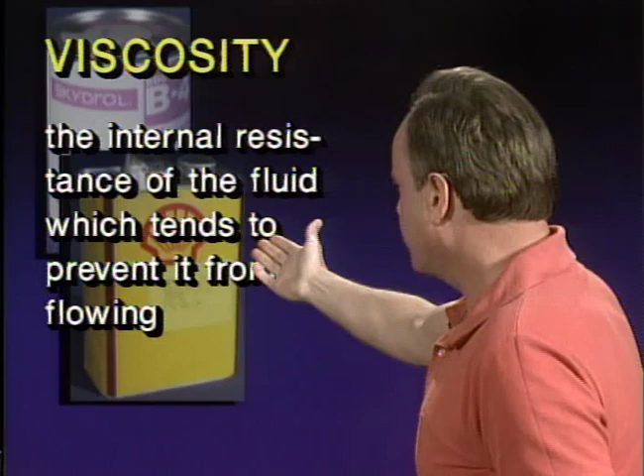They're also going to ask you, what is the viscosity of a fluid? What does that mean? Well, viscosity is the internal resistance of a fluid that tends to prevent it from flowing, slows it down quite a bit.

What are desirable properties of a good hydraulic fluid? Well, they are low viscosity, chemical stability so they don't combine with other things or create chemical reactions, and high flash point. Now, flash point is when the fluid gives off ignitable vapors - you want that to occur at a very high temperature. And high fire point - fire point is getting enough vapors to support flame. Those are desirable characteristics of a good hydraulic fluid. I would think so too.

Now, when you're servicing hydraulic systems, you want to use the type of fluid specified in the aircraft manufacturer's maintenance manual or the service manual or the instruction plate affixed to the reservoir unit. In other words, you cannot go wrong doing what the manufacturer tells you to do.

Now, let's take a look at the two most common types of hydraulic fluid currently found in aircraft. By the way, hydraulic fluids are dyed a specific color for each type of fluid. One fluid is mineral-based, referred to as petroleum-based. Petroleum is a mineral, and it is dyed red, so if you saw the fluid itself, you'd know it was dyed red. The other is phosphate ester-based, which is Skydrol, a synthetic, and it's dyed purple.

Now let's take a look at some information they want you to know. First of all, information about the compatibility of fire-resistant hydraulic fluid with aircraft materials can be obtained from the manufacturer's technical bulletins. So where do you get information about the compatibility of materials with hydraulic fluids? The manufacturer's technical bulletins. You cannot go wrong by using the manufacturer's information.

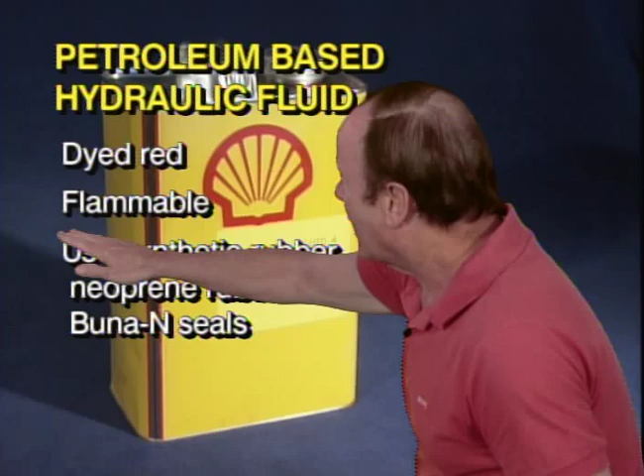Now let's take a look at some of the pros and cons of these hydraulic fluids. First of all, petroleum or mineral-based hydraulic fluid, as you remember, is dyed red. One of the cons, I would think, is that it is flammable. I can't think of why that would be a good thing, but one of the pros is you can use it with synthetic rubber, neoprene rubber, and Buna-N seals. The FAA wants you to know that additives have improved the properties and characteristics of petroleum-based hydraulic fluid through the years.

Now let's take a look at vegetable-based hydraulic fluid, which is mil spec 7644. These aren't used very much anymore, but they're dyed blue in color. They're flammable under normal conditions, and vegetable-based hydraulic fluid is used with natural rubber seals. That's the reason it's not used much anymore - there aren't too many natural rubber seals around anymore.

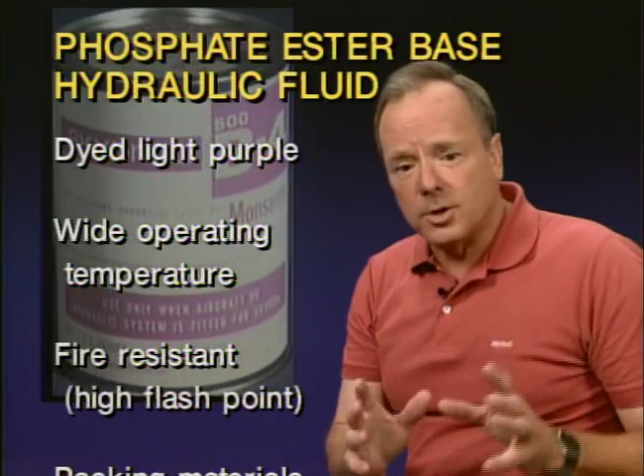Now, as you already know, both petroleum-based and vegetable-based hydraulic fluids are flammable under normal conditions. Well, that's really not as good as it could be, so mankind made an improvement with a synthetic hydraulic fluid called Skydrol, or more officially phosphate ester-based hydraulic fluid. It's a synthetic, dyed light purple, with a wide operating temperature range. But the most important thing, it's fire resistant - it has a high flash point, tremendous temperatures, and it doesn't catch fire.

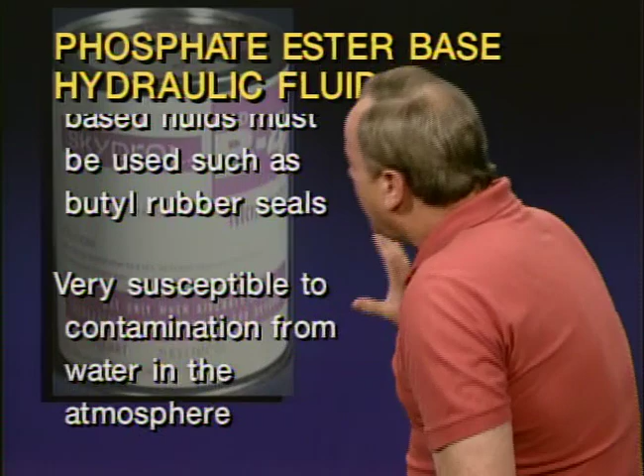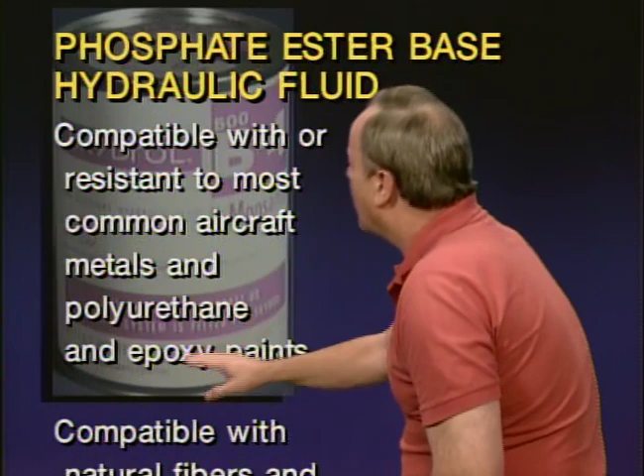Now, packing materials made for ester-based fluids must be used when you're using this - an example would be butyl rubber seals. Not just any kind of packing materials, they must be made for it. The biggest disadvantage of phosphate ester-based fluid is it's very susceptible to contamination from water in the atmosphere if you leave it unprotected. However, it is compatible with or resistant to most common aircraft metals, and official FAA materials say it's also compatible with polyurethane and epoxy paints - these are the ones that look wet all the time, really shiny. I can tell you from experience that's not necessarily true, but it is the correct answer on the test.

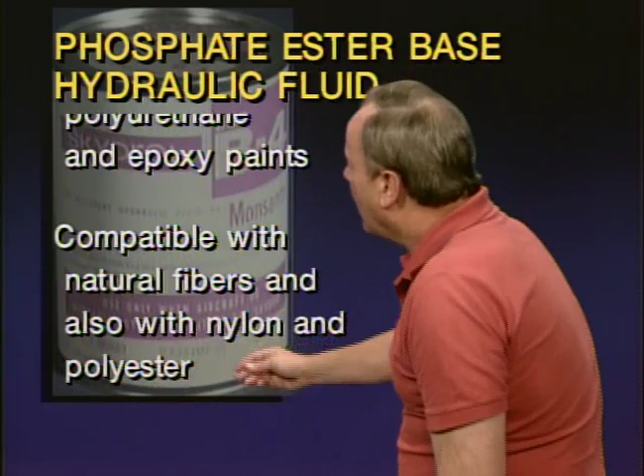It's also compatible with natural fibers and also with nylon and polyester. So it's pretty good stuff, very flexible, high flash point, really great.

But you cannot mix it. In fact, they're going to ask you a question about mixing hydraulic fluids. Let's take a look at that question now.

Now, let's assume you have an aircraft hydraulic system that requires mineral-based hydraulic fluid like 5606, and let's assume instead you use a phosphate ester-based fluid like Skydrol. The question is, what is going to happen? Well, the system will become contaminated because the fluids will not blend, and the seals will fail. That's considered to be a very bad thing.

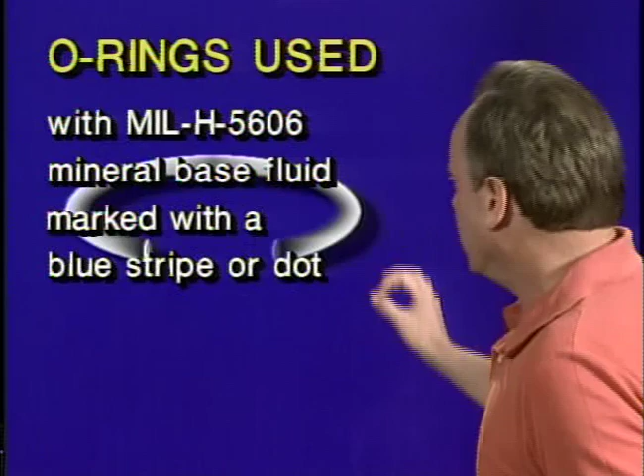Now, if the O-ring has a little blue stripe or a dot, it's to be used with mil-spec 5606 mineral-based fluid. So if you're going to use it with mineral-based fluid, it should be marked with a blue stripe or a dot. All right, let's talk about high-pressure O-rings.

Now let's assume you're going to operate an O-ring in a system having above 1500 psi. One of the problems you could have when you got very high pressure is that the O-ring actually gets squeezed by the hydraulic pressure until it's in between the moving and the stationary part. They call that extruding it. It gets extruded between the two.

What do you do to prevent that? And the answer is you use a backup ring. There are special rings made to back up the O-ring to keep the O-ring from extruding between the moving and the stationary part.

Now, where do you put the backup O-ring? Do you put it on the pressure side of the O-ring or on the side away from the pressure? And the answer is you put the backup O-ring on the side away from the pressure. That's where it would tend to be extruded through, so that's where you put the backup O-ring.

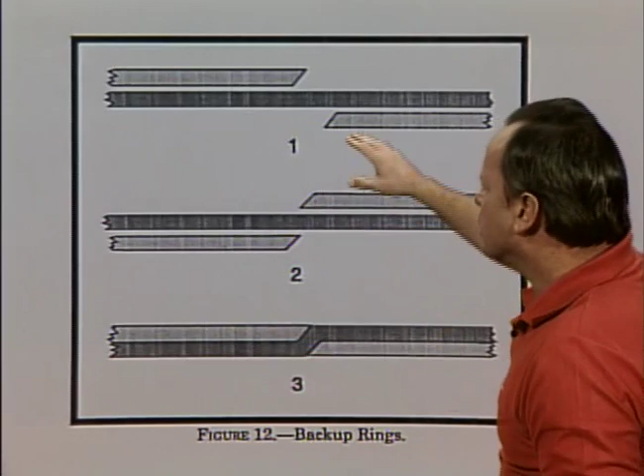Now let's take a look at figure 12, and let's assume that you have a Teflon backup ring. They're going to ask you to look at three possibilities for Teflon backup rings, and which of these spirals would be the correct one. What you want to avoid is having any kind of joggle. You can see that spiral 2 would have a joggle, spiral 1 would not, spiral 3 would not. So illustrations 1 and 3 show the correct spiral for Teflon backup rings.

Now, let's take a look at the difference between gaskets and packing materials. Gaskets are normally used in stationary parts, and packing materials are flexible sealing elements, seals, used when you're subject to motion. So packing materials are flexible sealing elements used subject to motion, and that's in between moving parts normally we're talking about here.

Now, to protect packing rings or seals from damage when installing them over or inside threaded sections, if you're going to put an O-ring — which can be a packing material — over a threaded section, put a little cardboard on the threaded section, then put the O-ring on it, just protecting the seal from the threaded sections. This should be covered with a stiff paper sleeve, as they say on the test.

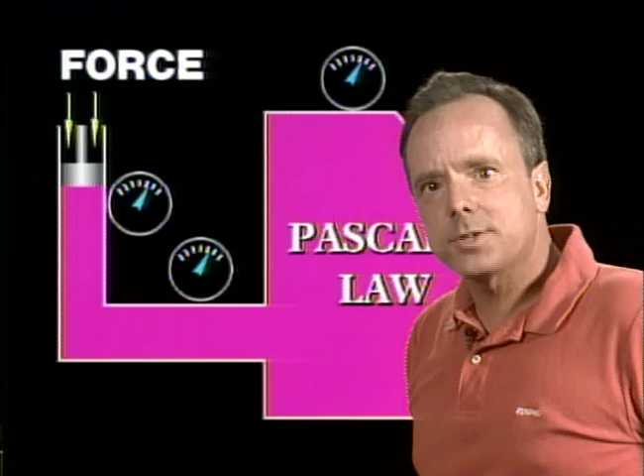Now let's take a look at some basic hydraulic information they're going to ask you on the test. First of all, they're going to ask you about Pascal's law. And here's a good example of Pascal's law: pressure in an enclosed hydraulic system is equal and undiminished in all directions. In other words, if you have 100 pounds per square inch here, you've got it everywhere in the entire system. And that's the principle in which hydraulic systems work, and that's Pascal's law.

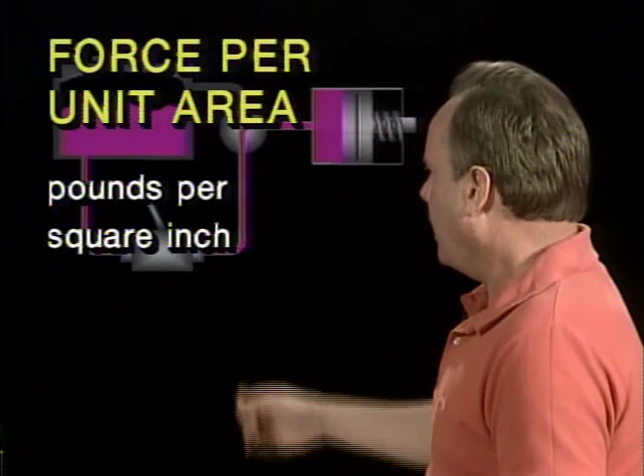Now, pressure is a term used to indicate the force per unit area. They're going to ask you this on the test. It's force per unit area, and it's expressed in pounds per square inch. So pressure is expressed in pounds per square inch. Now let's assume you take a hydraulic system like this and you build up 100 psi pressure, pounds per square inch pressure.

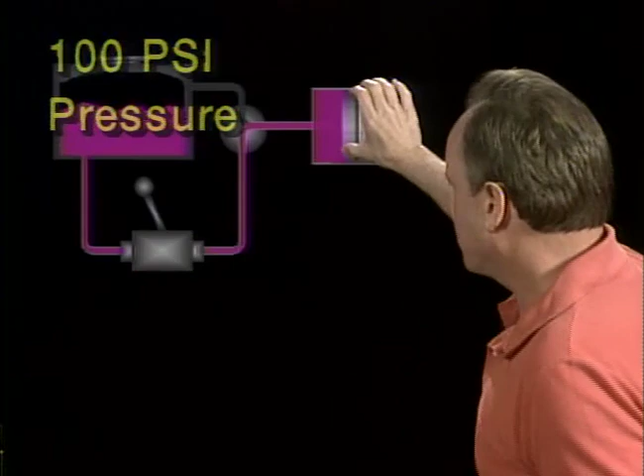Let's assume the piston is 1 inch diameter, with a 1/2 inch line, and an actuating cylinder that's 2 inches in diameter. They're going to ask you the question: what is the pressure in the line between the pump and the actuator? Well, if you have 100 psi anywhere in the system, you have 100 psi everywhere in the system. It doesn't matter whether you have a 1/2 inch line, a 2 inch line, a 2 inch cylinder, or a 1 inch cylinder - it doesn't matter at all. If you have 100 psi anywhere inside the closed part of the system, you've got 100 psi everywhere, and that's what they're asking you on the test.

Hydraulic systems in aircraft have certain characteristics. One of them is minimum maintenance requirements. Others are that they're lightweight and simple to inspect, and that's why they use hydraulic systems in aircraft.

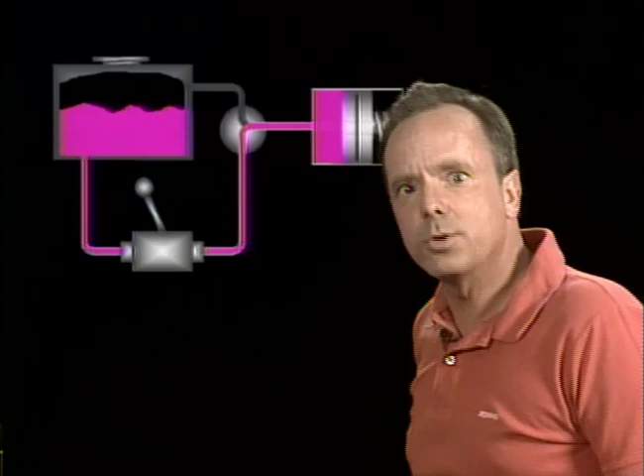Excluding lines, they're going to ask you on a test what are the basic components required to make a simple hydraulic system. Let's take a look. First of all, you have to have a pump - here we have a hand pump. You have to have a reservoir to supply that pump. Then you have a selector valve, so you can decide whether you're going to run it to the actuator or back to the reservoir. And finally, you have an actuator. So the simple parts of a hydraulic system are just those things: the pump, the reservoir, selector valve, and an actuator.

Now they're going to ask on a test, what is a hydraulic system referred to as a power pack system? A power pack system is when you have the motor and pump all together as one unit, and they say that on the test as having hydraulic power components in one unit. The motor and the pump are all together.

Now let's assume you get air in a hydraulic system. They're going to ask you, is that normally a problem? And the answer is no. Removal of air from a hydraulic system generally presents no problem because the air will be removed by operating the various hydraulic components through several cycles. So air is not normally a problem in hydraulic systems.

Now they're also going to ask you a question about air. They'll say, if the time required to operate a hydraulically actuated mechanism decreases with successive operations, what does that mean? In other words, if it operates better and faster every time you operate it, it indicates the air is being worked out of the system.

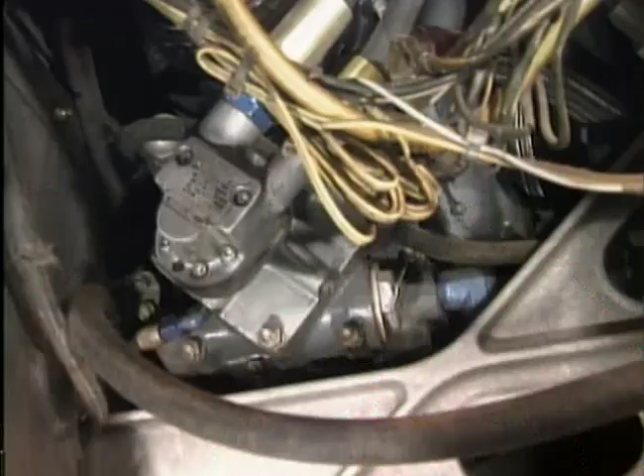Let's take a look at a few things the FAA wants you to know about hydraulic pumps. First, there are two types: constant displacement types and variable displacement hydraulic pumps. A constant displacement hydraulic pump is able to deliver a uniform rate of fluid flow - the same amount of fluid per minute comes out. On the other hand, a variable displacement hydraulic pump is a current design that contains a built-in means of system pressure regulation, and it can vary the amount of fluid that it delivers. That's the difference between the two.

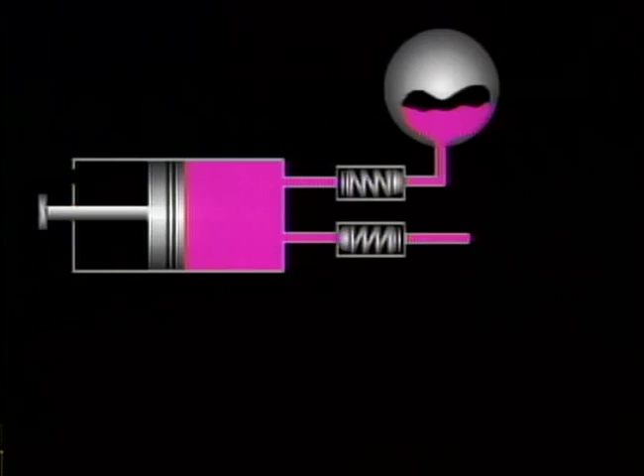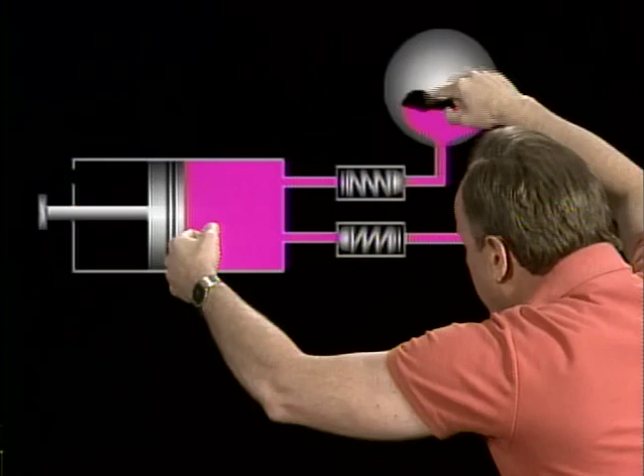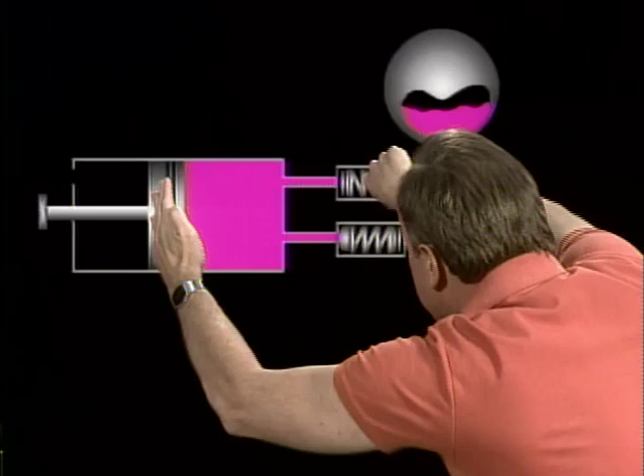The FAA wants you to know a few things about pump malfunctions, so let's talk about how a pump functions before we talk about how it malfunctions. Here's a hand hydraulic pump, very simple. This piston is connected to a handle, and you move the piston back and forth. When you move the piston to increase the size of the cylinder, hydraulic fluid flows from the reservoir through this check valve into the hydraulic cylinder. This check valve allows fluid to flow in but not out again - that's the input or import valve. Then when the piston is all the way at the far end of its travel, you push back on the piston. This check valve won't let the fluid go back that direction, but the output valve lets the fluid go out and won't let it return. So you have two check valves.

One lets it flow in, the other lets it only flow out, and that's a very simple hand pump.

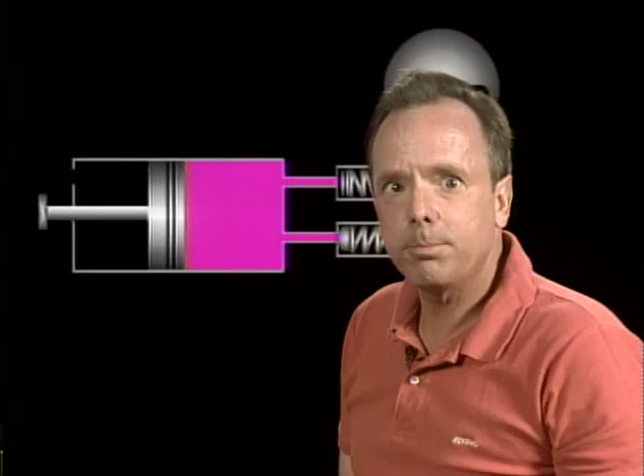Now they're going to ask you a question about a malfunction of this pump. They're going to say if the handle of a rebuilt hydraulic hand pump cannot be moved in the pumping direction. In other words, you can pull it out, but you can't push it back. What's likely to be the problem?

The answer is you might have installed this check valve backwards such that it won't let the fluid out. So one possibility is an incorrectly installed hand pump outport check valve, probably installed backwards.

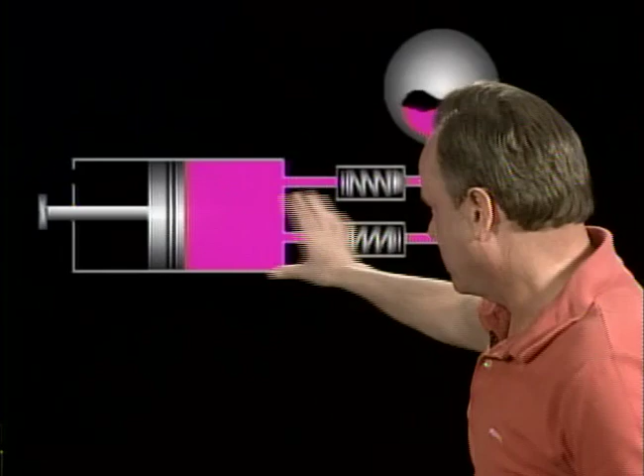Let's take a look at another question they might ask you about this. They'll say, let's assume you're operating a hand pump like so, and you have severe kickback. By the way, this could be an emergency hydraulic pump. That's what this would be, just a hand pump. What would that severe kickback indicate?

The answer is it indicates the hand pump outport valve is sticking open, because if this check valve sticks open, it lets the fluid come back and kicks back against the handle. So the hand pump outport check valve is sticking open if you have severe kickback.

Those are the couple questions they're going to ask you about hand pumps. Now let's assume you have a mechanical, not a hand pump, but a powered pump, electrically powered, and you have chattering of the hydraulic pump. What does that mean? Chattering of the pump is generally an indication of air in the system, and it could be caused by a leak in the pump inlet. That's generally the case, a pump inlet leak.

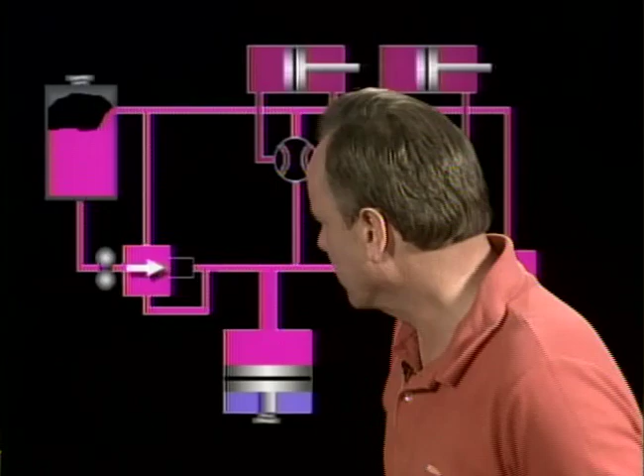Now let's see if you and I together can figure out a more complicated hydraulic system. Here's a little bit more complicated one. We're going to use this as a model throughout the rest of the course here about hydraulics, so let's take a look at it. First of all, you and I have a hydraulic reservoir, and then we have the hydraulic pump here. We could be having a gear pump here, some way to increase the hydraulic pressure.

Then you have a regulator or an unloading valve that, when the pressure gets high, unloads the pressure and sends it back to the reservoir directly instead of through the hydraulic system. Then after you go through the regulator, you have the accumulator.

An accumulator has air on this side, hydraulic fluid on this side. Now, one of the principles of hydraulic fluid is hydraulic fluid cannot compress. It's incompressible. But air is compressible, so if you have this accumulator, as you increase the hydraulic pressure, it compresses this air. It's kind of a way of storing energy.

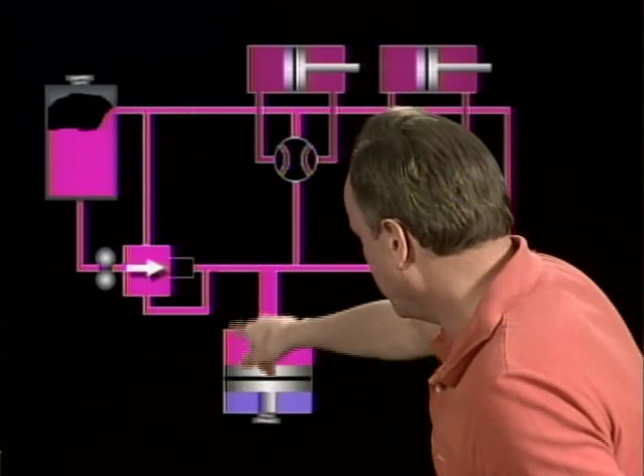It stores hydraulic fluid. When a pump gets overloaded and is delivering all it can deliver and you still need more, this accumulator can move this piston down and release some more hydraulic fluid into the system. So it's kind of a way of storing hydraulic fluid and storing energy.

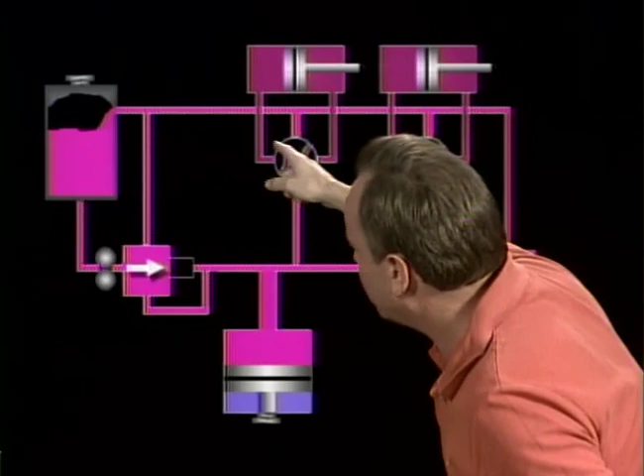It's called the accumulator. Then you'll have actuator valves, and you turn the actuator valve and operate the system with it, and what's left over, or what's being returned, goes back to the reservoir. And then you'll have a pressure relief valve in the system somewhere over here, like so. So here's a pressure relief valve.

Now, a typical question they might ask you about this: a hydraulic pump of the correct capacity fails to maintain normal system pressure during the operation of, say, a cowl flap actuating unit. So let's assume one of these actuators is actuating the cowl flap actuating unit, and you have the proper hydraulic pump, but it cannot maintain hydraulic pressure.

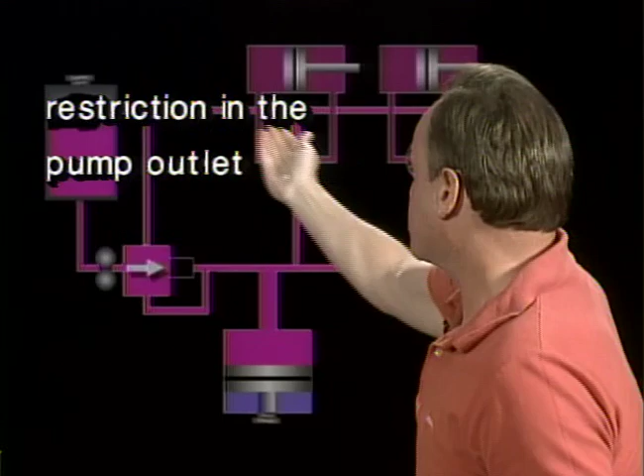What's the probable cause? If you can't maintain hydraulic pressure, and you have the proper pump right here, you might check for a restriction in the pump outlet. Let's take a look and see why that might be a problem.

First of all, you have to know where the pressure gauge is, and that's the important part of this. You have to know where the pressure gauge is. The pressure gauge is normally after the accumulator and before the actuator.

If you can't maintain pressure here, it probably means you're not getting proper flow out of the pump, period, and you should check for that restriction in the pump outlet. Now, where is the gauge normally? After the actuator, or after the accumulator, before the actuator, like so.

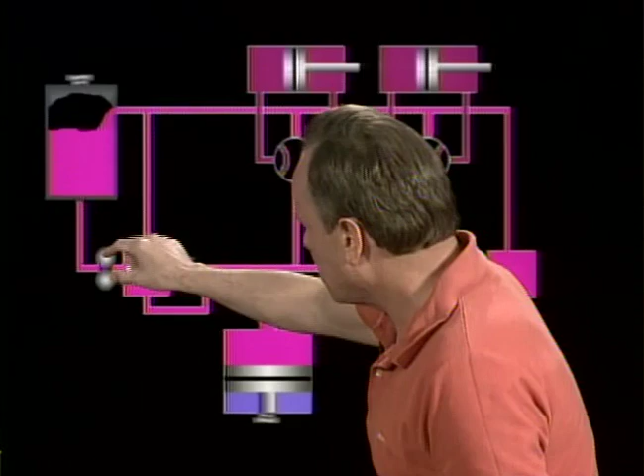Now, let's say you have a worn hydraulic pump shaft seal. You have a hydraulic pump, and the pump turns on a shaft, and the seal there is worn. Obviously what's going to happen is you would have hydraulic fluid leaking. So how would you detect a worn hydraulic pump shaft seal? You detect that by hydraulic fluid flowing from the pump drain line. Normally you would have a pump drain line and hydraulic fluid would get in there, and that would tell you you have a worn hydraulic pump shaft seal.

How about that? You really wanted to know that, didn't you?

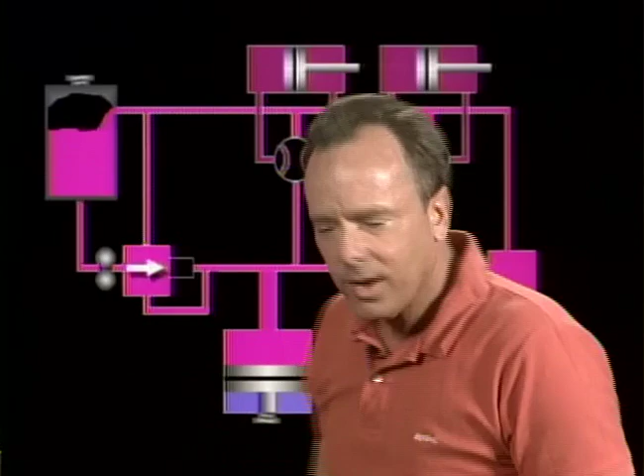Now let's assume you have a hydraulic system control and relief valve unit, and they fail to function properly. How do you keep this pump from overpressuring? If your relief valve unit or control valve unit fails, how do you keep the pump from having too much pressure? The way you keep it from having too much pressure is you have a shear section on the main hydraulic pump drive shaft. In other words, if all fails to work properly and the relief valves don't work, the pump itself is protected because the drive shaft will have a shear section and it will shear itself off, protecting the whole system from blowing something up. The shear section or shear pin on the shaft of an engine-driven hydraulic power pump allows that shaft to break to protect the pump from overload if the pump should seize.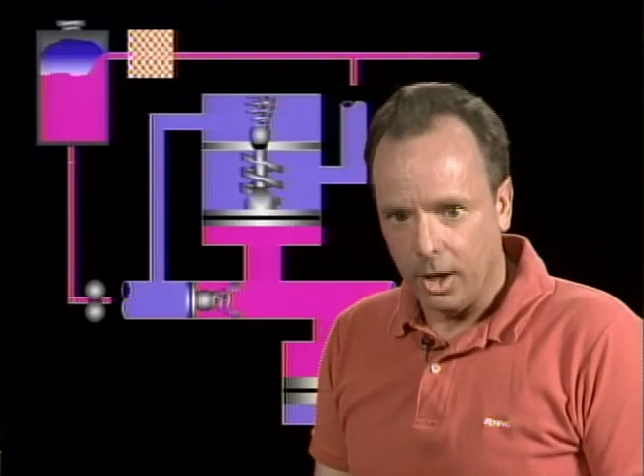All right, let's talk about pressure regulators. A pressure regulator in a hydraulic system, just after the pump, is used to maintain system operating pressure within a predetermined range. The way it works is normally you'll have a spring and ball system, and if the pressure gets too low, it'll allow the pressure to build up in the system. If it gets too high, it bypasses, and that's the whole idea. So the pressure regulator also relieves the pump of its load when no actuating units are being operated, sending the fluid back to the reservoir.

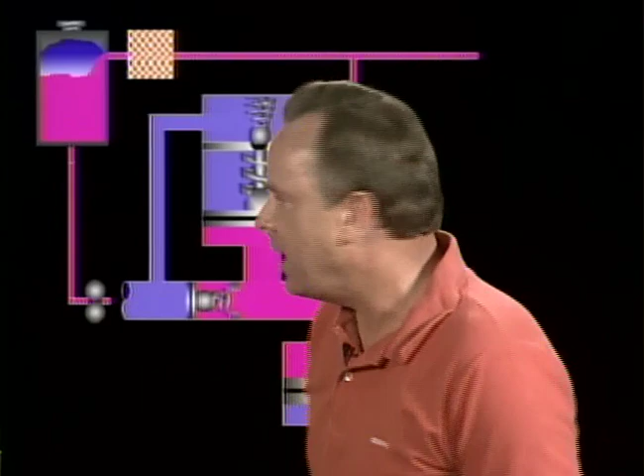Now, if the pressure regulator of a hydraulic system using a constant displacement pump diverts the fluid from the system to the reservoir, the output pressure of the pump decreases and the volume remains the same, because it simply allows it to flow back to the reservoir. So it does regulate the pressure, but it does not regulate the volume of the fluid, and that's what they want you to know on the test.

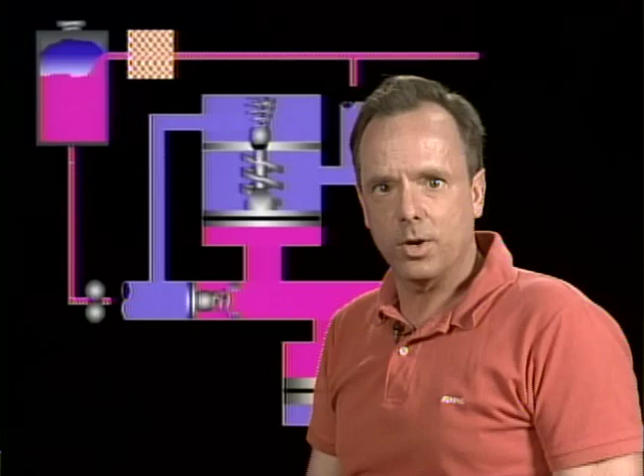Now, the pressure regulator in a hydraulic system with a constant delivery pump allows circulation of the fluid when no demands are made on the system, and that's the answer to an actual FAA type test question. Another term for this pressure regulator is an unloading valve, and it's used with the hydraulic pump to relieve pump pressure, so it's called an unloading valve.

Now they're going to ask, on all types of pressure regulators, is any attention required from the pilot? The answer is, on the spool type or any other type of hydraulic system regulator, they're automatic and require no attention from the pilot or flight crew. So that's one thing you don't have to pay attention to as a pilot.

Now if it's necessary to adjust several pressure regulating valves in a system, the procedure is to adjust the one with the highest pressure setting first, because you want to adjust each one at its own highest pressure setting.

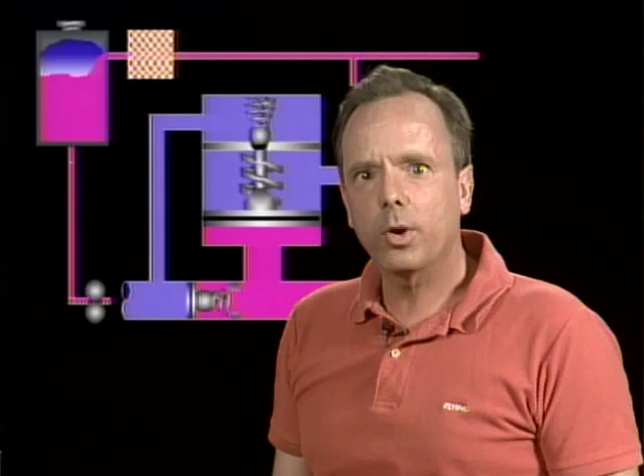Now they say, let's assume you want to remove a spool type or a balanced type pressure regulator from a hydraulic system. What precautions should you take?

The answer is to actuate some actuator, maybe the flap selector valve, until no pressure remains in the system. Remember, the accumulator can keep pressure in the system, so before you remove any components in the hydraulic system, bleed the pressure off by operating an actuator. You're trying to empty the accumulator.

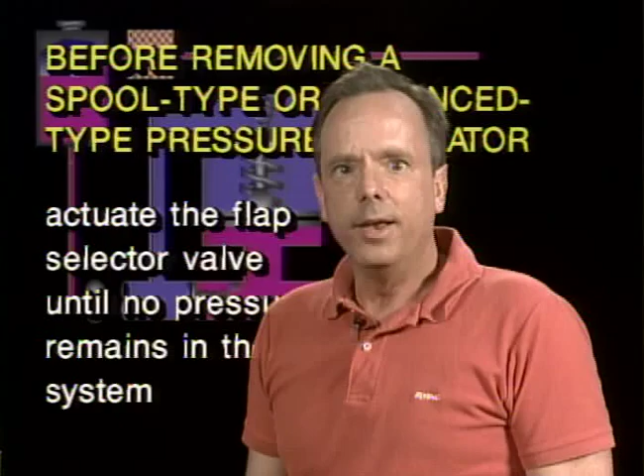Now they're also going to ask you what is a restrictor in a hydraulic system. A restrictor is any kind of restriction in the system to slow the flow. What is the purpose of a restrictor? The purpose is to control the rate of movement of hydraulically operated mechanisms, and you do that by putting a restriction in a line somewhere.

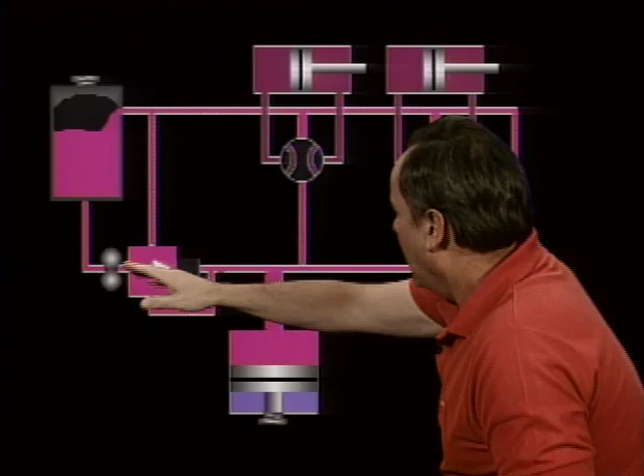It's called a restrictor. Now let's take a good close look at a hydraulic accumulator. It says hydraulic accumulator, inflate to 600 psi. Let's take a look at a hydraulic accumulator inside the system and see what we have. Here's the system: we have a reservoir which supplies hydraulic fluid to the pump, and then a pump increases the pressure and sends it down the line.

And then we have the accumulator. It has either a piston or a diaphragm, and on one side is hydraulic fluid, and on the other side is air. The purpose of this accumulator is to store or release energy, and here's how it works. The neat thing is air is compressible - it will compress and expand - whereas hydraulic fluid is not compressible, it will not compress and expand.

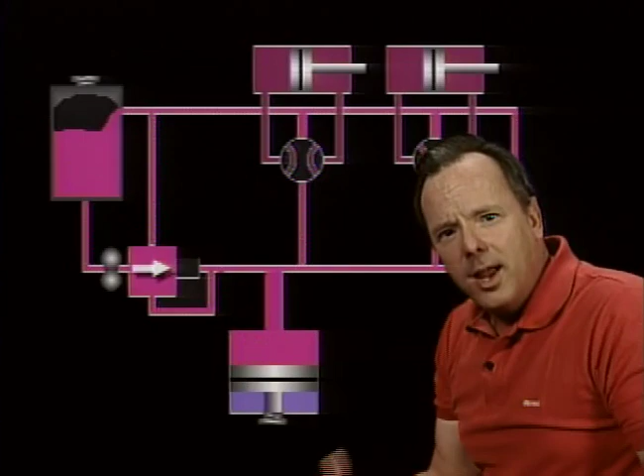So if you want to store some energy, you can pump air to this side of the accumulator and have hydraulic fluid on this side. If you have too much pressure, you wind up storing fluid because you compress the air and the excess hydraulic pressure goes into the accumulator. If, on the other hand, the hydraulic pressure begins to drop down a little bit, then the air shoves the piston or diaphragm this way and releases some of the energy it's stored up in terms of compressed air.

Now why would you want this hydraulic accumulator in here? Let's assume you're pumping fluid, you've got one of these controls activated, and all of a sudden somebody shuts it off, and the pump keeps on operating. There will be a great big pressure surge which will rattle throughout the entire system unless you have an accumulator. Because if you have one, the hydraulic fluid will go into the accumulator. The increased pressure will push this piston back, and by compressing the air, you'll store that energy and get rid of that surge.

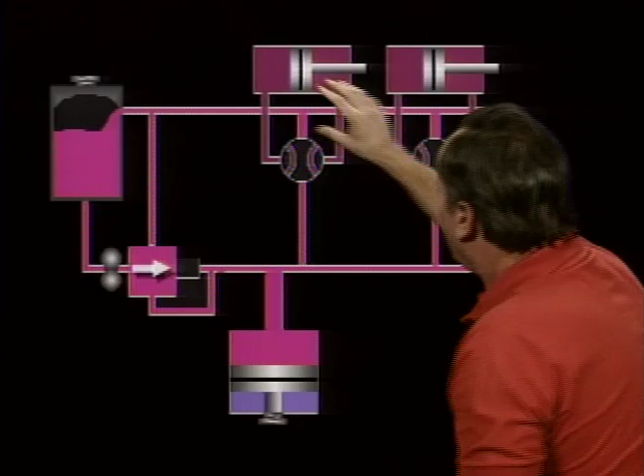Now let's assume you open up a whole lot of devices and you've got a need for a lot of hydraulic fluid, but you exceed the pump capacity - the pump is putting out all it can put out. Then the hydraulic accumulator comes into play again, because as the pressure begins to drop, this compressed air will force the piston or diaphragm in this direction and make up for the fact that the pump isn't putting out enough fluid. It will temporarily supplement the system pump when demand is beyond the pump's capacity. Or the pump could completely fail, and for some period of time the accumulator will still keep pressure on the system.

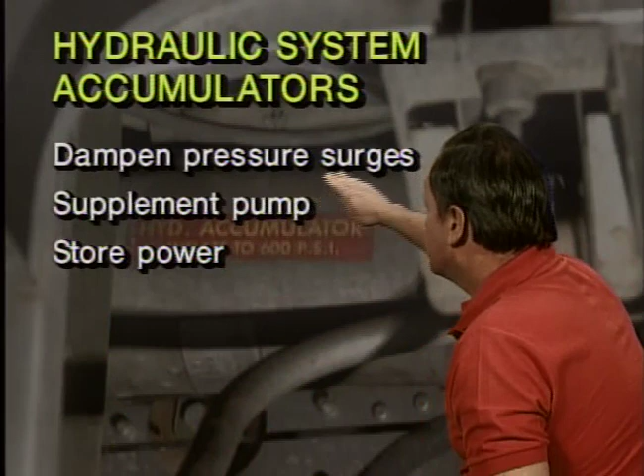So there are three things this hydraulic accumulator does. Number one, it dampens pressure surges in the system. Number two, it supplements the system pump when demand is beyond the pump capacity. Number three, it can store power for limited operation of components even if the pump is not operating. Another thing you need to know is a fully charged hydraulic accumulator provides a source of additional hydraulic power when heavy demands are placed on the system, so it's a wonderful device.

Now, to determine the air pressure charge in the accumulator, if the engine is inoperative but the system still has hydraulic pressure, there is a procedure you can follow. What you want to know is what is the air pressure here in the accumulator. We're assuming, of course, we don't have a gauge right here, but we have a gauge on the hydraulic side somewhere. There are some systems where you can actually read the air pressure inside the accumulator.

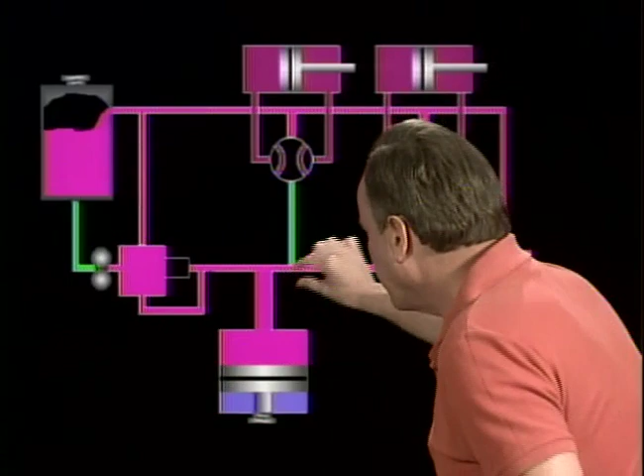All right, but if you don't have a gauge there, here's what you do: operate some hydraulic units slowly, then note the drop on the pressure gauge. Remember, the pressure gauge is on the hydraulic side of the system. Note the point at which you get a rapid drop in pressure. The pressure is going to stay about the same as the air pressure until all of a sudden this piston hits the stop, hits the limit, and then the hydraulic pressure drops off precipitously. That pressure just before the rapid drop is the pressure inside the accumulator, assuming the gauge is on the hydraulic side. So you simply operate an actuator until you get a rapid drop, and the pressure before that drop was the pressure in the accumulator, because the piston bottomed out in its travel.

So you take a look at this accumulator, you notice the air charge should be inflated to 600 psi. Here's how the FAA is going to ask you the question: to check the air charge in a hydraulic accumulator, reduce all hydraulic pressure, observe the reading of the accumulator air charge, and that's just before you get the rapid drop.

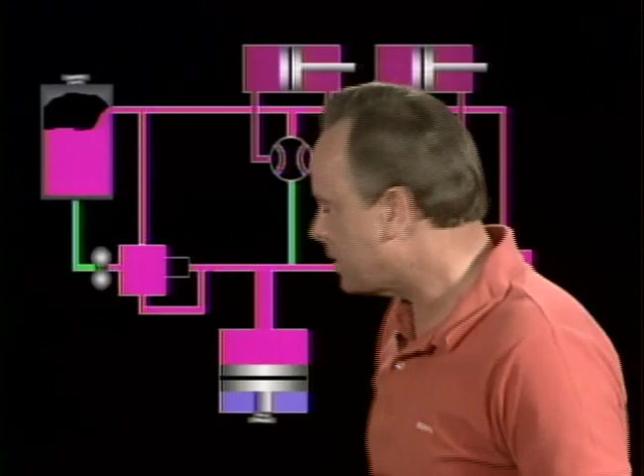Now let's take a look at that accumulator again and talk about something else. You notice there's a barrier between the hydraulic fluid side and the air side of the accumulator, and that's necessary to prevent air from entering the fluid system. It physically separates the air chamber from the oil chamber, and it could be done with a piston or a flexible or moving separator.

Now let's assume that you depress the core valve, the air core valve, often called a Schrader valve, to drain some air out, and when you do that, you get hydraulic fluid. What does that mean? If hydraulic fluid is released when the air valve core of the accumulator is depressed, it's evidence of a ruptured diaphragm. It means there's a leak and you're getting oil in the air and air in the oil.

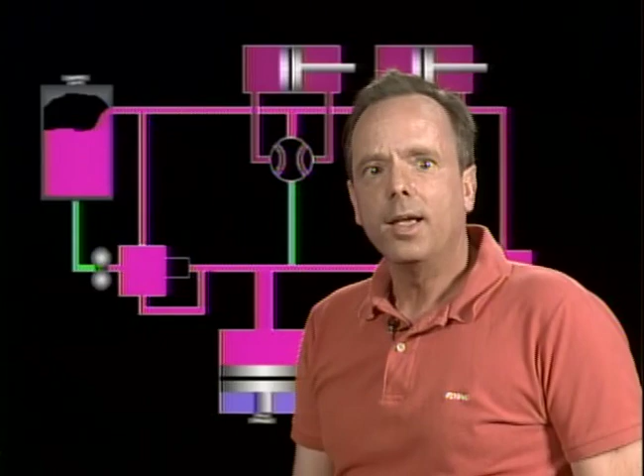Now let's assume a hydraulic accumulator has been installed and the air chamber has been charged. The main system hydraulic pressure gauge, on the hydraulic side, will not show a reading until the fluid side of the accumulator has been charged. That means you won't get any pressure on this side until the piston is away from its stops. Then these two will be equal to each other. But when the piston's on a stop, either one or the other, they won't be equal. Now they're going to ask you another question about this.

Let's assume you have a hydraulic accumulator and you charge it with an air preload on the air side of 1,000 psi. You then develop a hydraulic system pressure of 3,000 psi. The question is, when you've moved this piston off the stop and now have a hydraulic system pressure of 3,000 psi, what will be the pressure on the air side of the accumulator now? The answer is it'll be 3,000 psi. When the piston is off its stops, these two will be equal to each other, even if it was only charged with 1,000 to begin with.

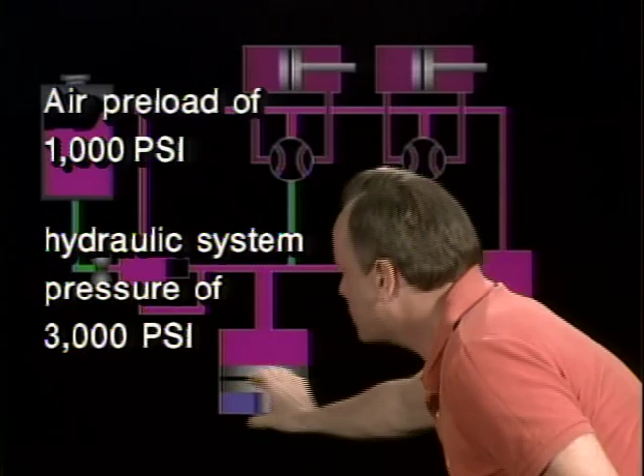If an aircraft's constant pressure hydraulic system cycles more frequently than usual, and no unusual fluid leakage can be detected, what would this tell you? The answer is low accumulator air preload. That means if you have very little airspace in here, the pressure will build up very rapidly because the piston will hit its stops on this end, and you'll have the hydraulic system relief valve work, not work, work, not work. So one of the things the accumulator does is give you space to operate without having the system cycle on and off all the time, and that's the whole idea.

If the hydraulic system pressure is normal while the engine-driven pump is running, but there is no pressure after the engine has been shut off, what does that indicate?

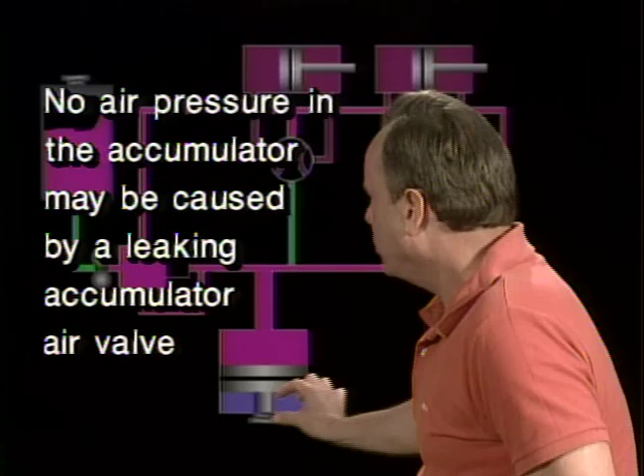The answer is no air pressure in the accumulator, which may be caused by a leaking accumulator air valve. If you had no air pressure in the accumulator, there would be no pressure after the engine has been shut off, because there would be no air here to expand and keep the pressure on.

Now, what would cause a loud, hammering noise in a hydraulic system having an accumulator? Generally, a loud hammering noise usually indicates too low or no preload in the accumulator. You're getting hydraulic hammering, and the accumulator is not allowing room for the hydraulic pressure to be relieved here, as it's normally relieved in part by the accumulator.

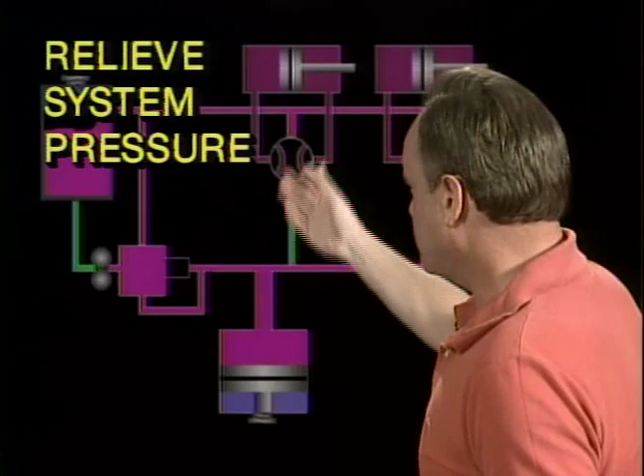Now let's assume, once again, you want to remove an accumulator or any part of a hydraulic system from the system. What do you first do? The answer is you first relieve system pressure. If you want to remove any component of this hydraulic system, you better remove system pressure, and you do that by operating an actuator valve.

When hydraulic systems operate at high hydraulic pressures and high rates of hydraulic fluid flow through them, that causes an increase in the hydraulic fluid temperature. For that reason, sometimes you have to put in a heat exchanger. So heat exchanger cooling units are required in some aircraft systems due to the fact that the hydraulic fluid gets hot. Now let's take a look at a relief valve in a hydraulic system.

Here's a good example of a relief valve. A relief valve, of course, is to keep the system from over-pressurizing and causing damage, so at some particular point, and you can adjust the point, you relieve the pressure.

Now there's another valve you need to know about, and that's called the power control valve. A power control valve is used in simple hydraulic systems, and when you turn the power control valve, the hydraulic pressure goes up and the actuator works. When the power control valve is turned the other direction, the pressure does not build.

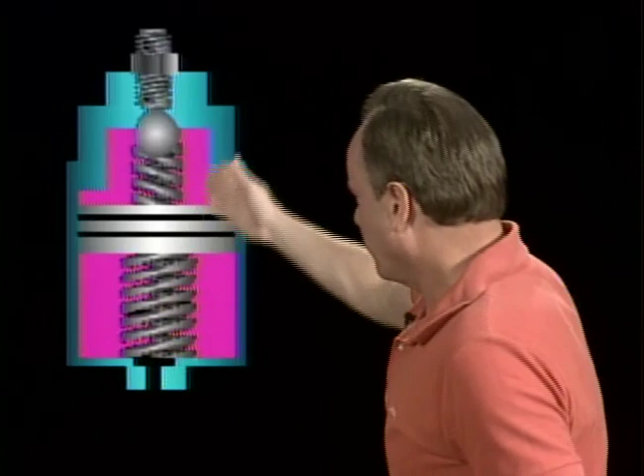Well, if you wanted to adjust the pressure that the relief valve pops off at, would you have to have the power control valve in the open or closed position? The answer is the power control valve should be in the closed position to adjust the relief valve.

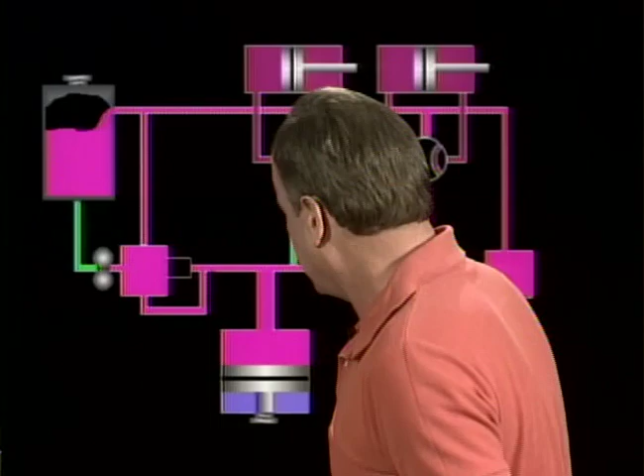Now let's take another look at our complicated hydraulic schematic here. Here's the relief valve in this corner. And the other valve that did a similar function was called the regulator, right here, or sometimes called the unloading valve. If you want to adjust this relief valve, you've got to eliminate the action of the unloading valve, because the unloading valve will unload the pressure before the relief valve does.

So they ask you a question about this: before adjusting the relief valve of a hydraulic system, eliminate the action of the unloading valve, and that makes an awful lot of sense.

Now, there is another valve you could have, the thermal relief valve. If it's installed in a hydraulic system, it'll have a higher pressure setting than the main system relief valve or the pump unloading valve. It'll be the highest pressure of them all, because that's for when your airplane's sitting on the ground and pressure builds up due to heat. The thermal relief valve has the highest pressure of them all.

Now let's assume you have a flap overload valve. What would that be for? The answer is to prevent the flaps from being lowered at airspeeds which would impose excessive structural loads on the flaps. It's just a valve that keeps too much hydraulic pressure from going to the flaps so you don't damage them. It relieves instead of damaging the flaps.

Now let's take a look at some other valves, selector valves, check valves, things of that sort. We talked about some of these briefly. The check valve in a system allows one-way flow. So on the FAA test, you need to know the check valve allows free fluid flow in one direction and no fluid flow in the other direction. That is a check valve.

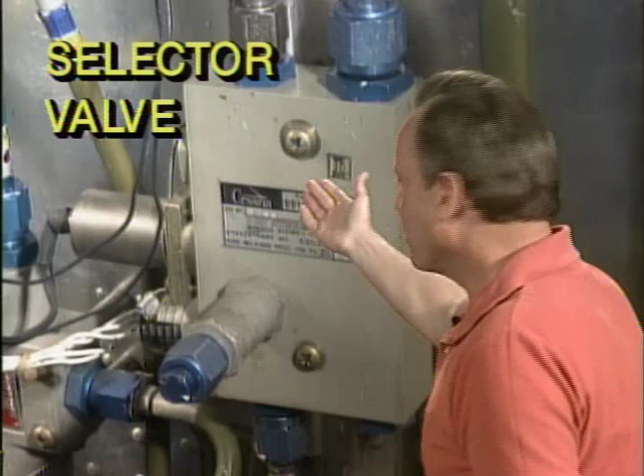Here's a good example of a selector valve. They're going to ask you on the test, what is a selector valve used for? In FAA talk, a selector valve is used to direct pressurized fluid to one end of an actuating cylinder and simultaneously direct return fluid to the reservoir from the other end. That is the purpose of a selector valve. Aren't you glad you don't talk like that all the time?

A 4-port closed center valve is one of the most commonly used selector valves, and it provides for simultaneous flow of fluid into and out of a connecting actuating unit in a hydraulic system. That's a 4-port closed center valve.

Now, one distinguishing characteristic of an open center selector valve used in a hydraulic system is that it allows fluid to flow through the valve in the off position. An open center type, as you remember, has no pressure on it until you close it, then it goes through the actuator; otherwise it goes right through the open center valve.

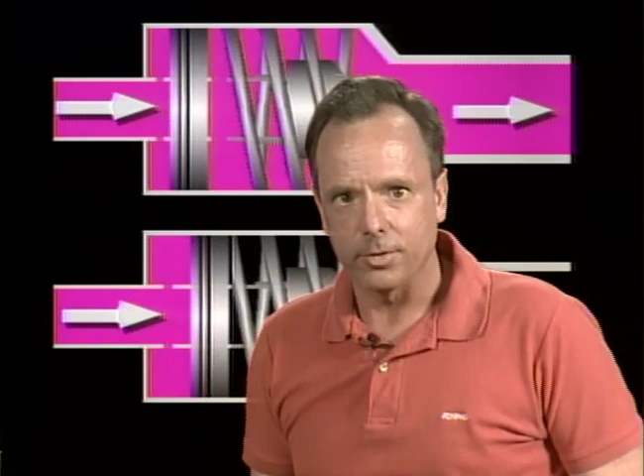Now they're also going to ask you, what is a hydraulic fuse? It's really a very clever thing, and it works like this. You have hydraulic fluid that normally flows through this situation and all the way through. But if, for instance, there's a rupture in a line, you want to stop the fluid from going through that ruptured line. So when the fluid starts moving at too fast a rate, it moves this piston into another position which covers up a hole.

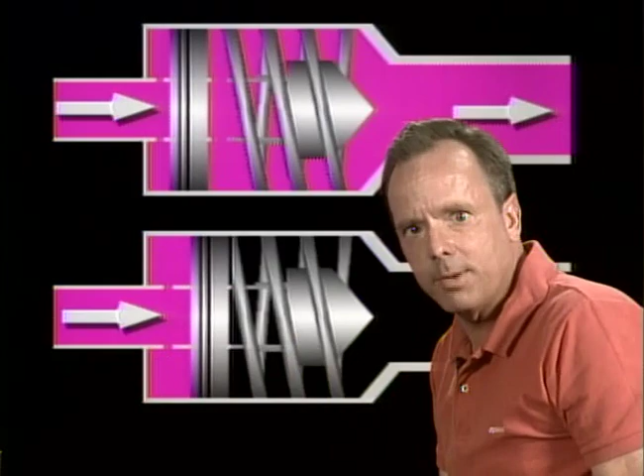Then it stops the fluid from going through, and that's called a hydraulic fuse. It's incorporated in some hydraulic systems to allow normal fluid flow in the line, but it closes if the flow increases above an established rate. That's a hydraulic fuse, and it's just a gorgeous, gorgeous thing.

All right, let's take a look at reservoirs. Here's a good example of a reservoir right here. The main purpose of a pressurized reservoir in a hydraulic system is to prevent hydraulic pump cavitation.

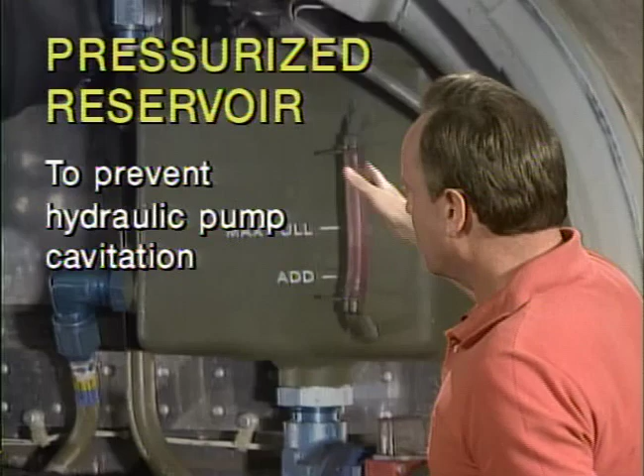A pressurized reservoir is used in an airplane that flies at very high altitudes. Normally, air pressure forces the fluid to the pump from the reservoir, but at very high altitudes there's very little air pressure, so you need to pressurize the reservoir to prevent cavitation of the pump and keep it from foaming in the reservoir.

If the hydraulic reservoir is pressurized with turbine engine compressor bleed air, an air pressure regulator is used to reduce the air pressure between the engine and the reservoir. So you have to regulate the air pressure that goes into a pressurized reservoir. Before removing the filler cap of a pressurized hydraulic reservoir, it's a good idea to relieve the air pressure so you don't blow your head off. It's a wonderful idea to make sure you relieve the pressure.

Now, let's take a close look at a hydraulic system reservoir. If we go even closer and backlight it, what you'll see in there is a standpipe. That standpipe gives you an emergency source of hydraulic fluid in case the reservoir itself develops a leak. You still have the fluid left in the standpipe.

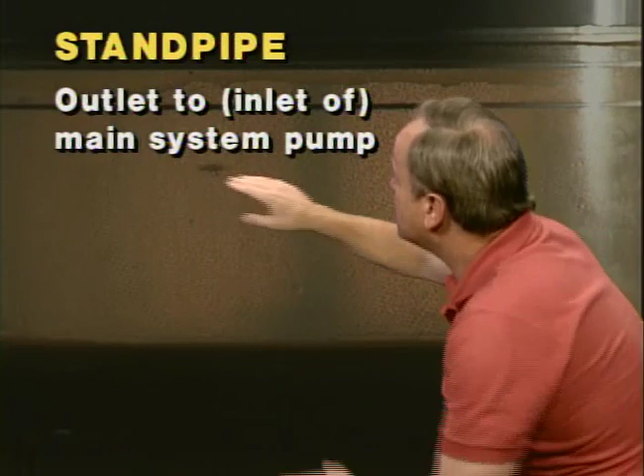That standpipe is located at the outlet of the reservoir itself or the inlet of the main system pump. So in the event you have a leak in the reservoir, this standpipe still gives you a supply for the main system pump. There's another provision for problems, because some reservoirs contain a small quantity of fluid which is not available to the main system pump, and that goes to the auxiliary pump. With this kind of redundancy, you've got a backup for all sorts of contingencies.

Now, if during a hydraulic system operational check the wing flaps cannot be lowered using the main system—here's an airplane that might use a hydraulic flap system—but you can lower the flaps using the emergency hand pump, what does that tell you? The answer is you probably have a low fluid level in the reservoir, and you're only getting fluid from the auxiliary system or the standpipe.

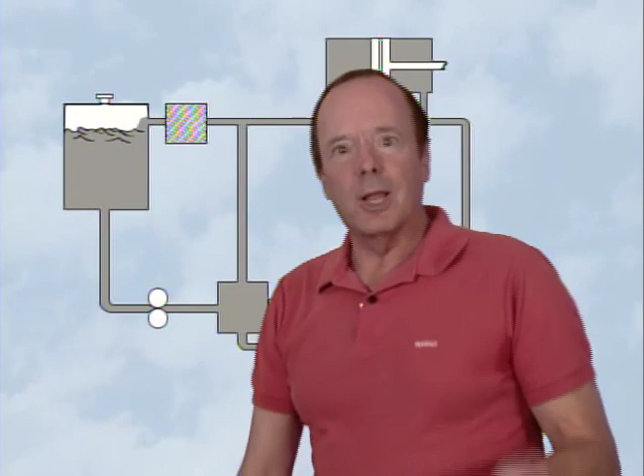Now, let's assume you want to add fluid to a hydraulic reservoir. The FAA asks you a question about this in kind of a weird sort of way. They say, let's assume it's a constant pressure hydraulic system, and you're adding fluid while the system is pressurized. Let's take a look at what's going to happen here.

Here is your fluid, here's your pump, and when the system is pressurized, the fluid goes into the accumulator. This is a nitrogen charge, and as the system is pressurized, the fluid fills up this accumulator, compressing this nitrogen charge, making less room for the nitrogen and more for the fluid.

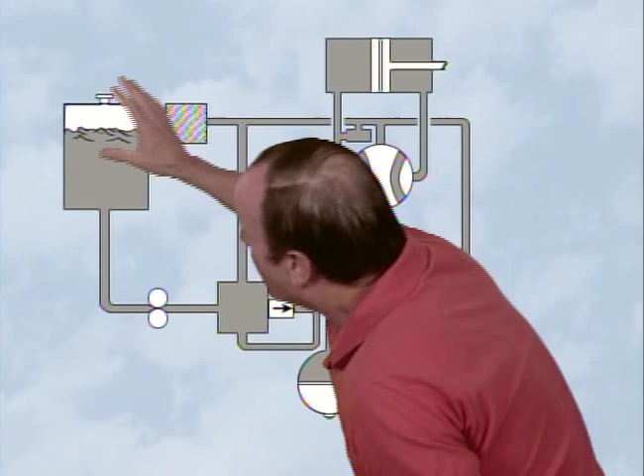Now, let's assume at this point, when you have the fluid system pressurized, you add fluid to the reservoir. Then you unpressurize the system. What's going to happen? Well, the pressure is going to come off, the nitrogen charge will expand and drive the fluid back out of the accumulator and fill up the reservoir even further.

Well, now what's going to happen then is if you had this reservoir very, very full, you could now overfill the reservoir. So you always want to make sure that you follow the manufacturer's instructions when you're adding fluid to a hydraulic system.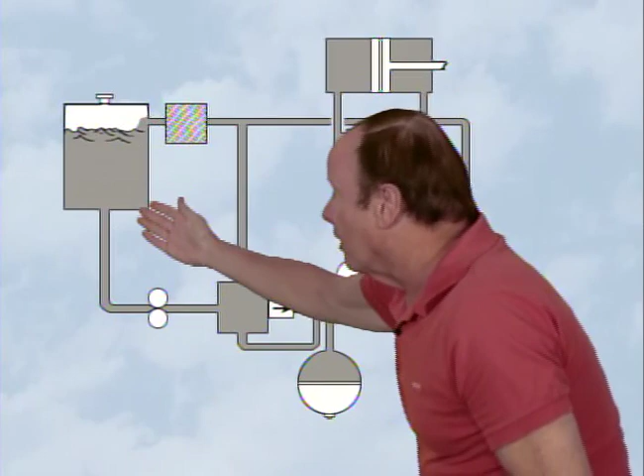On the other hand, if you have an inadequate supply of fluid, that will cause what? Well, if you had an inadequate supply of fluid, it's most likely to cause an excessive fluctuation of the pressure gauge when the hydraulic pump is operating. So if you see an excessive fluctuation of the pressure gauge when the hydraulic pump is operating, that probably would tell you that you have an inadequate supply of fluid.

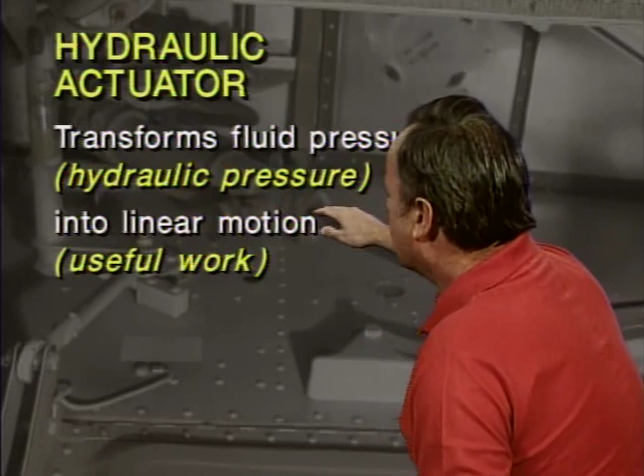Now, they're going to ask you some questions on the test about hydraulic actuators, and one type of hydraulic actuator is a hydraulic actuating cylinder, and they're going to ask you what is the purpose of that cylinder. Well, the purpose is to transform fluid pressure, which is hydraulic pressure, into linear motion so that you can do useful work. Now, these words are important: fluid pressure transformed into linear motion so that you can do useful work.

Now, another kind of hydraulic actuator is a hydraulic motor, and it converts fluid pressure to rotary motion. One type of hydraulic motor is a piston-type hydraulic motor, but any hydraulic motor has an advantage over an electric motor. What is that advantage? No fire hazard if the motor becomes stalled. So that is a great advantage, no fire hazard for hydraulic motors.

Now, if you have two actuating cylinders which have the same cross-sectional area, but have different lengths of stroke, and they're connected to the same source of hydraulic pressure, the question is, will they exert different amounts of force or equal amounts of force? The answer is, if they have the same cross-sectional area, they'll exert the same amount of force.

And will they move at the same rate of speed or different rates of speed? Because it's the same cross-sectional area and the same amount of fluid per minute enters this area, they'll move at the same rate of speed.

You might guess there's going to be another question coming about this. Let's assume you have two hydraulic actuating cylinders which have the same length of stroke, but they have different diameters. And they're connected to the same source. Will they operate at the same or different internal pressures?

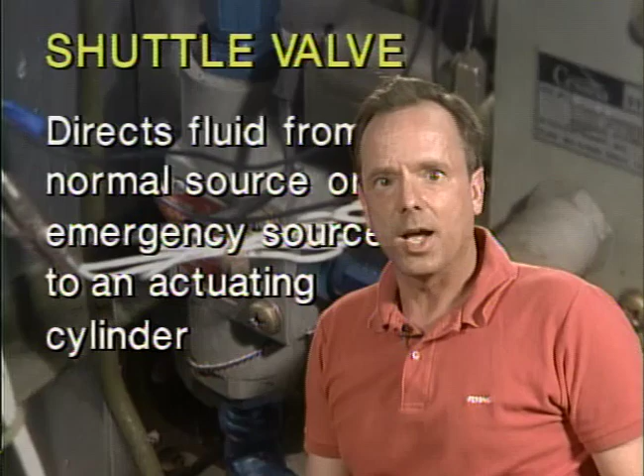They're going to ask you on a test also, what is a shuttle valve? Well, a shuttle valve is a hydraulic component which directs fluid from the normal source or an emergency source to an actuating cylinder. In other words, it chooses between the normal source and the emergency source, shuttles back and forth, and it directs the fluid to a hydraulic cylinder.

For example, a shuttle valve is used in the brake actuating line to isolate the emergency brake system from the normal power brake control system. It isolates emergency from normal brake systems.

They're also going to ask you, what is a cross-flow valve? That's designed to bypass fluid from one side of an actuating cylinder to the other side, and it's installed in the landing gear system on some aircraft. The cross-flow valve smooths or cushions the rate at which the landing gear goes down. It doesn't let it drop down. It forces fluid to go from one side of the actuating cylinder to the other to slow the gear down. That's called the cross-flow valve.

A common cause of slow actuation in any actuating unit is internal leakage in the actuating unit. The fluid is leaking past some seals, and therefore it's not doing its job, and it causes slow actuation.

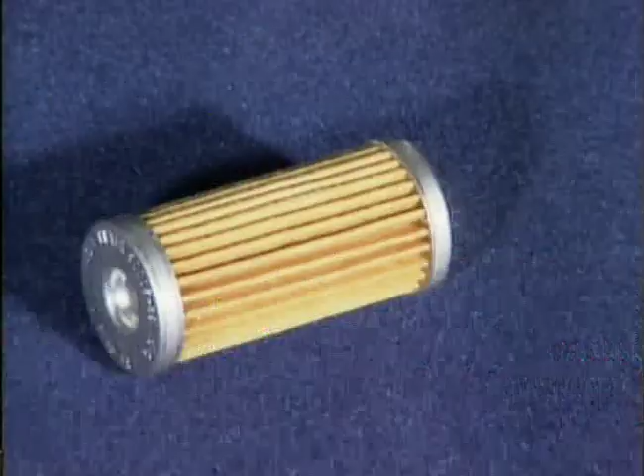You recognize this, don't you? It's a filter, though that's not what the FAA calls it. The FAA calls it a hydraulic fluid filtering element. They're constructed of porous paper, and the FAA wants you to know they're normally discarded at regular intervals and replaced with new filtering elements rather than being cleaned.

Let's take a look at a micronic filter. A micronic filter is a filter incorporating specially treated cellulose paper.

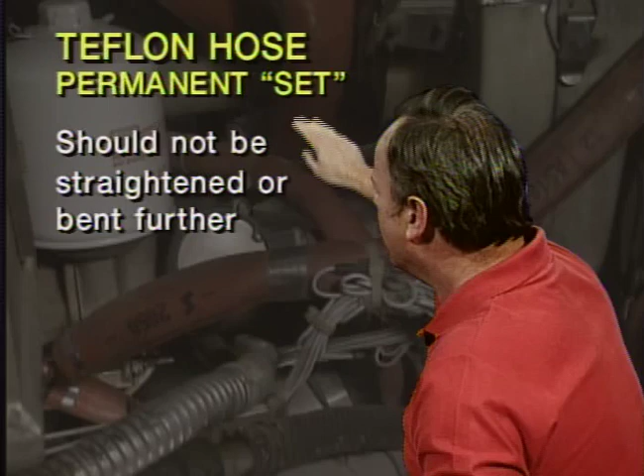The FAA wants you to know a few things about lines and tubing. For instance, let's assume you have Teflon hose that's been exposed to high pressure or temperature, and it's developed a permanent set - the shape is set into it. Now, should you change that set? The answer is no. Teflon hose that has a permanent set should not be straightened or bent further. If for some reason you remove it temporarily, you should put it back so that it has the same shape. You do not want to change that permanent set.

All right, let's take a look at hydraulic hose. Hydraulic hose, identified as Mil Spec 8794, the FAA wants you to know, will have a yellow stripe. In reality, it has yellow lettering like this, running the length of the hose, and that stripe is used to ensure that the hose is installed without excessive twisting, because the lettering would be twisted.

Now let's assume that you have an open end of a hydraulic line. You'd like to protect it from contamination. How would you do that? Well, you do it by sealing the lines with caps or plugs. Here's a good example that protects it from contamination.

Now let's assume you are installing metal hydraulic lines like these right here. What the FAA wants you to know is that you should put bends in the lines. That's actually a good thing because that will allow the tube to expand and contract with temperature changes, and bends also absorb vibration.

Now let's assume that you're installing a rigid tube up here to a fitting, and as you're doing it, the flare just won't quite reach the seat. Is it legitimate, the FAA wants you to know, to use this nut and pull it on? The answer is no, you can't do that by tightening the nut because you might wind up distorting the flare.

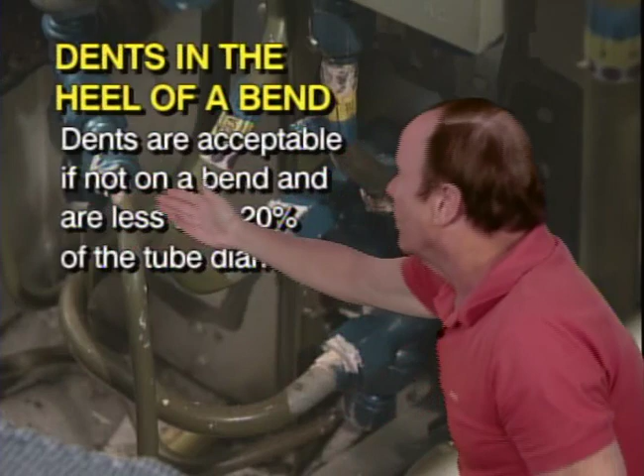Now, can you have dents in a hydraulic line? How about in a bend? The answer is no, you can't have dents in a bend or the heel of a bend. Dents in general are acceptable according to these rules - they're acceptable if they're not on a bend and they're less than 20% of the tube diameter. That's going to take some careful measuring, isn't it?

Let's talk about hydraulic fittings, and here's a couple real good examples of hydraulic fittings. These are quick disconnect couplings, and what they are is couplings that allow you to take the line apart without losing hydraulic fluid or letting air into the system. They use them for hydraulic pumps very often, so you can take the pump out of the system and inspect it real quickly without introducing air to the system or losing fluid.

Now, the FAA is going to ask you a question about it, so let's cover it exactly the way the FAA is going to ask you about it. They want you to know that quick disconnect couplings provide a means of quickly connecting and disconnecting hydraulic lines without loss of fluid or entrance of air into the system.

Now let's take a look at figure 11, and let's take a look at another question about hydraulic fittings.

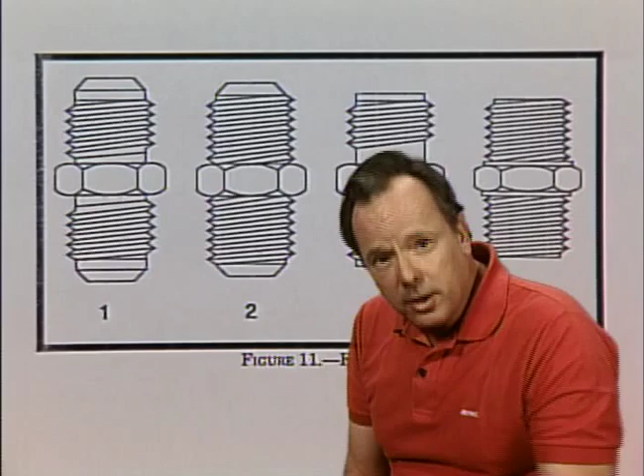The question is, if you look at 1, 2, 3, and 4, which of these are flared type fittings? The answer is 1 and 2 are flared type fittings, you can tell by the bevels. 3 and 4 are not flared type fittings because they don't have the bevels.

Of the flared fittings, the follow-on question is which of these is an AN type fitting? The answer is number 1 is an AN type fitting, and you can tell because the threads don't go all the way to the nut in the center, and you can look at the bevel if you're experienced and see that it's an AN type.

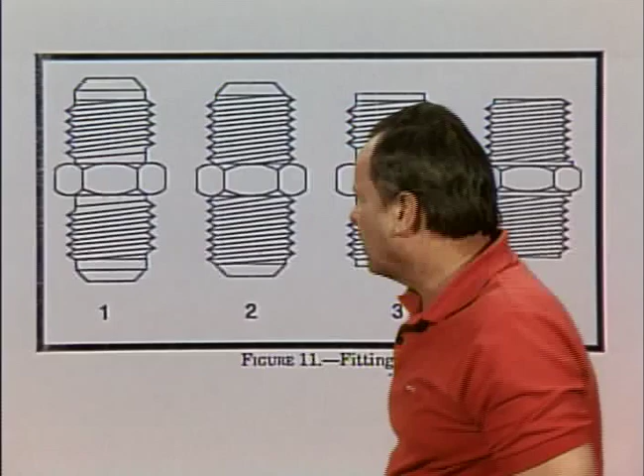Number 2 is an AC type fitting. They're going to ask you in a test which of these is an AN flared type fitting, and the answer is number 1. You look at the threads, they don't go all the way to the nut, and then you look at the bevel, which tells you it's a flared type fitting.

Now let's assume you're having an extremely hard day, and let's assume you service an aircraft hydraulic system with the wrong fluid. What do you have to do about it?

The answer is you're going to have to drain the system, flush it, and usually change all the affected seals. To flush a system normally serviced with Skydrol, you would use trichloroethylene.

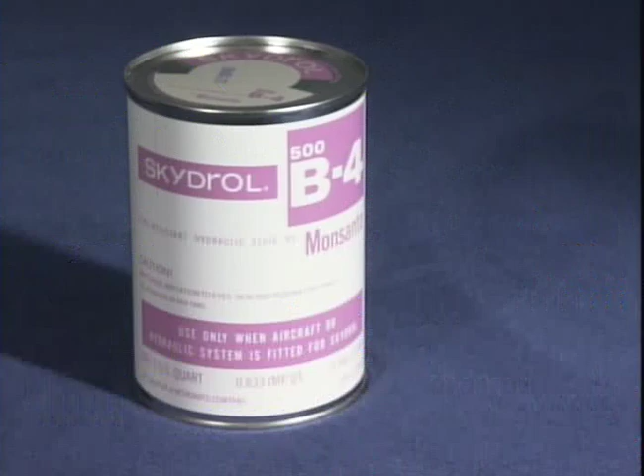Now let's assume you have a hydraulic system that uses Skydrol, which is phosphate ester-based hydraulic fluid. Let's assume you want to clean the outside of components in this system, like installed pumps, lines, and actuators. What could you use to clean those components?

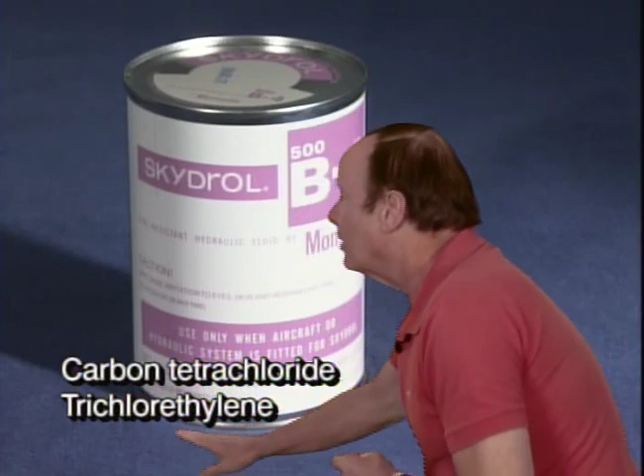The answer is you could use Stoddard solvent. It's only if you want to flush the inside of the system that you have to use the less handy trichloroethylene. By the way, do not confuse carbon tetrachloride for trichloroethylene. Carbon tetrachloride has been discovered to be toxic, you wouldn't want to clean anything with that.

How about mil-spec 5606 systems? If you have a system that normally takes petroleum-based 5606 hydraulic fluid, you'd flush that with naphtha or Varsol.

Now let's take a look at pneumatic systems. One advantage people claim for pneumatic power systems is that no return lines are required. You're using air as the medium, it's not particularly valuable, so you exhaust it or dump it overboard. Hydraulic fluid you want back, air you don't need back, so in pneumatic systems you do not need a return line.

The FAA wants you to know that relief valves are used in pneumatic systems as, in FAA terms, damage preventing units. That's a relief valve in a pneumatic system.

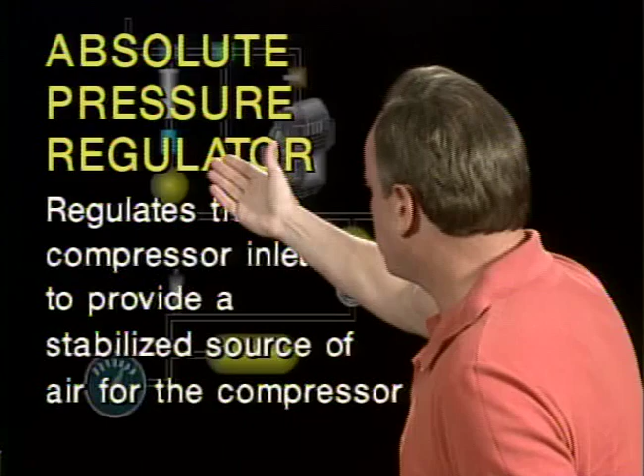Also, they'll ask you about the absolute pressure regulator. To understand it, you need to know that pneumatic systems are normally used on jets or turbojets. They use bleed air off the compressors, and then you have an air compressor that further compresses the bleed air. Absolute pressure regulators regulate the compressor inlet air to provide a stabilized source of air for the compressor.

Also, you have to have a moisture separator regardless of what kind of compressor you're using. A moisture separator is required on a system which incorporates an engine-driven multi-stage reciprocating compressor, and the reason you need one is to prevent freezing at the actuators.

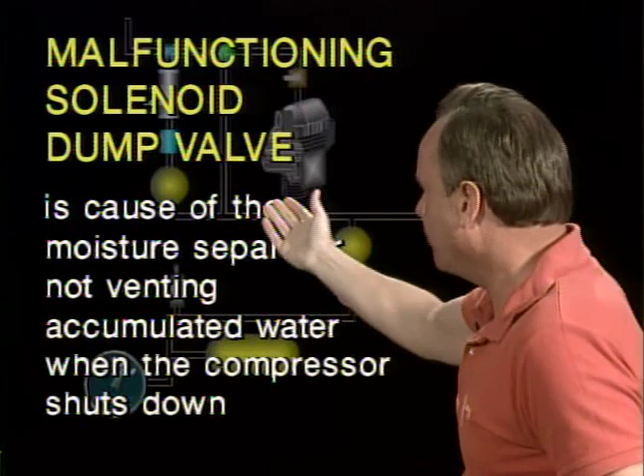Also, you have a solenoid dump valve in a pneumatic system, and it's supposed to actuate and vent accumulated water when the pressure or the compressor shuts down. But if you have a malfunctioning solenoid dump valve, that will cause the moisture separator to not vent accumulated water when the compressor shuts down.

The FAA turns these things around backwards for you. But believe it or not, you and I have covered everything the FAA wants you to know about hydraulics and pneumatics on the airframe written exam.